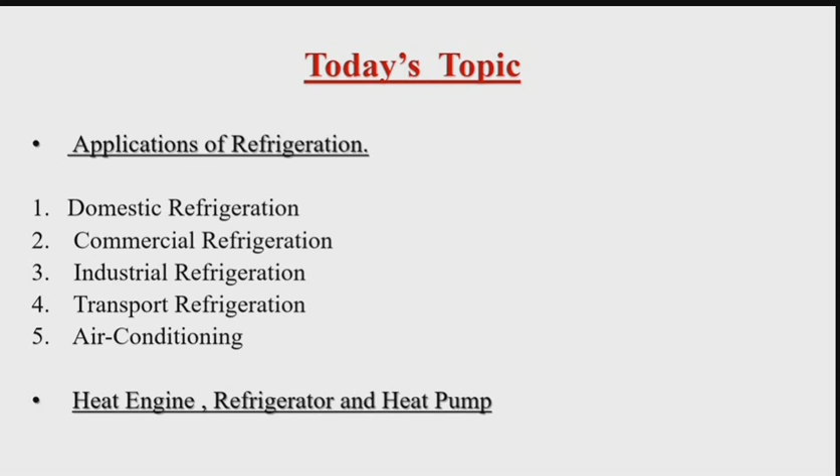In the application of refrigeration, there are mainly 5 applications. First one is domestic refrigeration, second one is commercial refrigeration, third one is industrial refrigeration, fourth one is transport refrigeration, fifth one is air conditioning. So what is domestic refrigeration? Domestic refrigeration deals with providing a low temperature place for preserving eatables, drinks and medicines.

The use of the refrigerator in our kitchen for the storage of foods, fruits and vegetables allows us to add fresh salad to our diet year round. There are a lot of fish and meat items we have to store, and we can store them in domestic refrigeration. Some meats and fishes need a longer storage period, so domestic refrigeration can also be used for storing these types of food items.

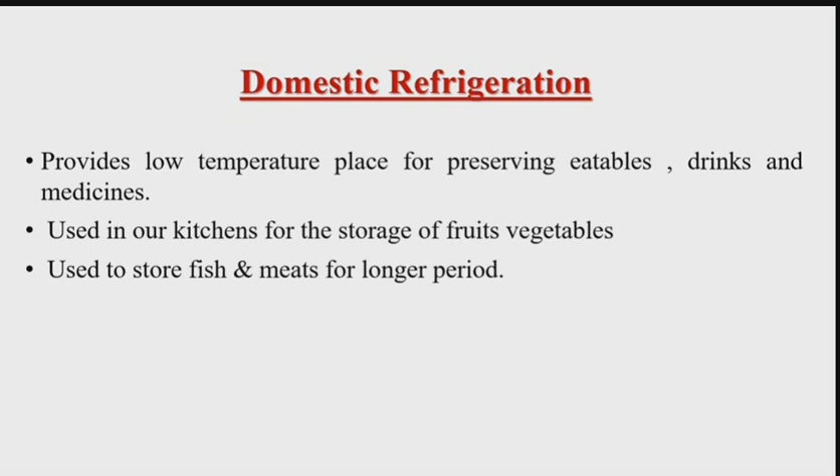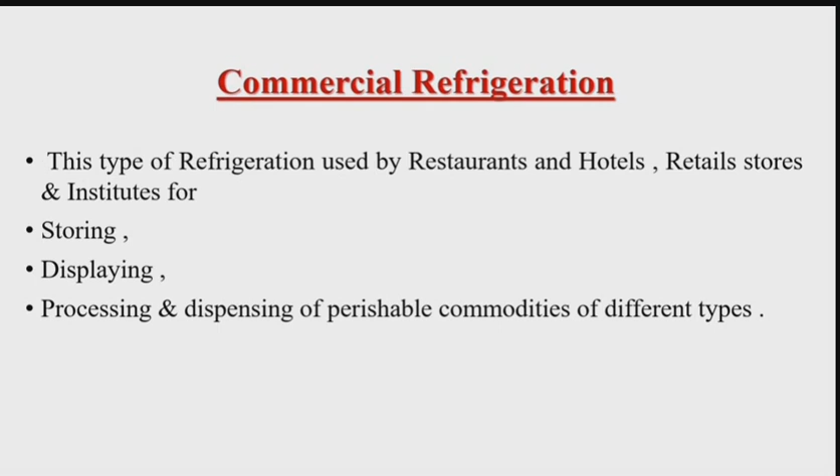The next one is commercial refrigeration. Commercial refrigeration is related to refrigeration fixtures of the type used by restaurants and hotels, and also retail stores and institutions, for storing, displaying, processing and dispensing perishable commodities of different types.

Next is industrial refrigeration. Here we are concerned with systems which are larger in size and cooling capacity than those of commercial applications, like industrial applications such as ice plants, large food plants, and chilling and storage of foodstuffs including beverages, meat and poultry products, dairy products, vegetables, fruits and fruit juices, etc.

The processing of food products and farm crops, and also the processing of textiles, printing work and photographic materials, all come under industrial refrigeration. Industrial refrigeration is also applied in oil refineries and synthetic rubber manufacturing. In oil refineries, chemical manufacturing and petrochemical plants, refrigeration is used to maintain processes that require low temperatures.

It is also used to liquefy gases like oxygen, nitrogen, propane and methane. For compressed air purification we need this industrial type of refrigeration; it is used to condense the water vapor from the compressed air to reduce its moisture content.

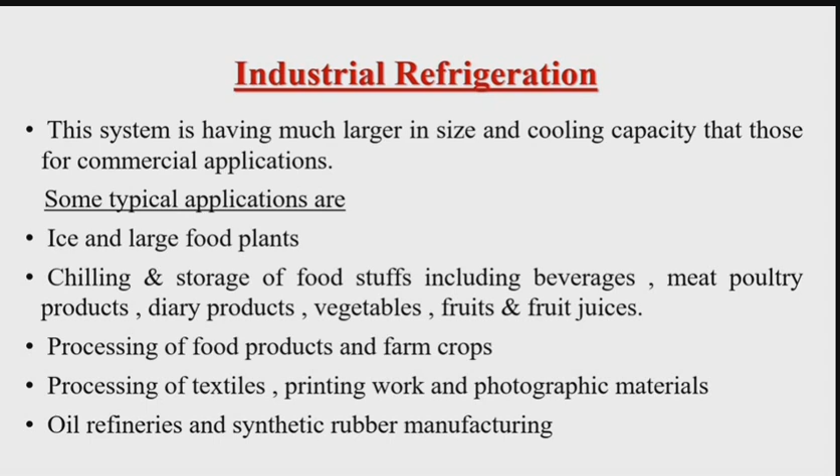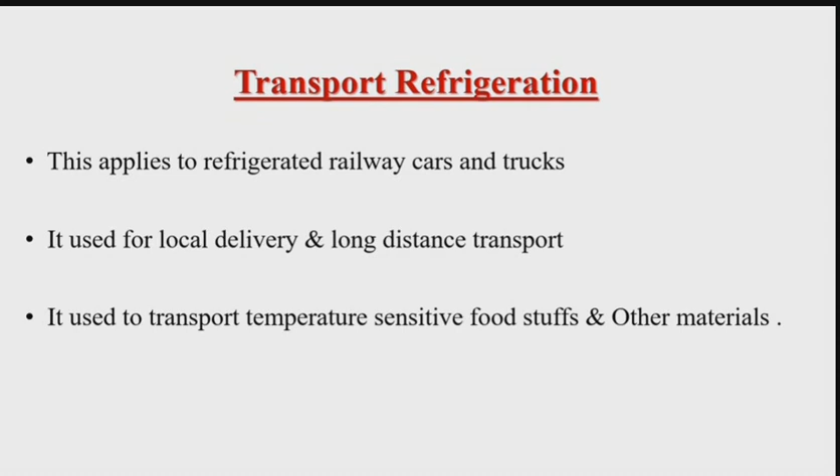Okay, the next one is transport refrigeration. We apply this to refrigerated railway cars and also trucks for local delivery and long distance transport of sensitive food items like fish and some other materials. Okay, so the next one is air conditioning.

So what is meant by air conditioning? Air conditioning refers to the simultaneous control of temperature, humidity, cleanliness and air motion. Space which is cooled to provide comfortable and healthy conditions for the occupants is called comfort air conditioning. Residences, offices, theaters and hospitals need air conditioning for these purposes.

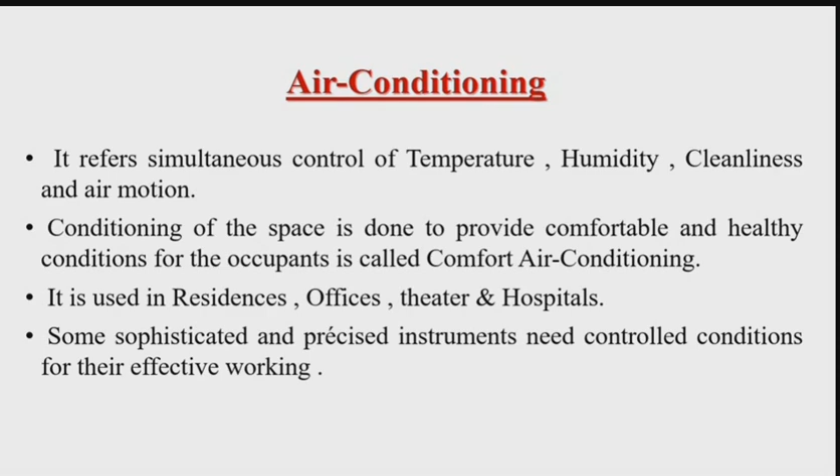Some manufacturing processes need to be done under controlled environmental conditions. Even some sophisticated precision instruments need these conditions controlled for effective working. Conditioning done for this purpose is called industrial air conditioning, and it is concerned with producing an environment suitable for computer centers, pharmaceutical units, printing works, photographic products, precision devices, production shops, laboratories, etc.

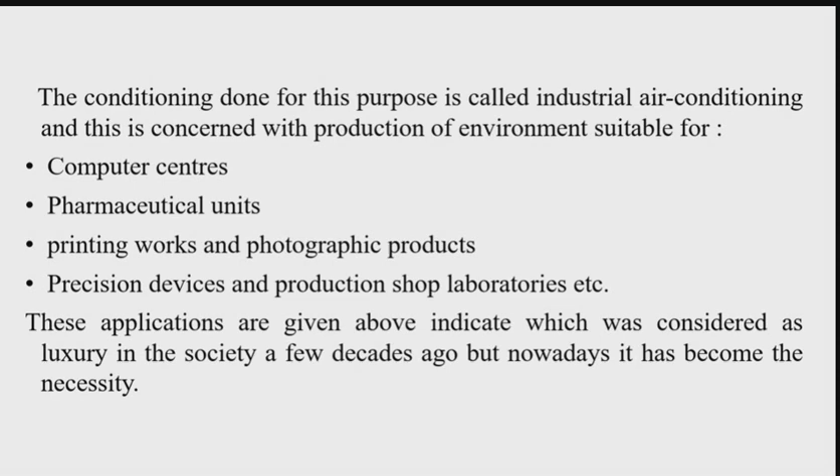These applications clearly indicate that refrigeration and air conditioning, which were considered a luxury in society a few decades ago, are nowadays very necessary for the present society and a tool for higher productivity. So that is about the applications of refrigeration. Now we are going to study about the heat engine, heat pump and refrigerator.

So what exactly is a heat engine? A heat engine is a thermodynamic device which is used for the continuous production of work from heat when operating in a cyclic process. As you know, both heat and work interactions take place across the boundary of this cyclically operating device. So essentially a heat engine takes heat from the combustion of fuel and converts some part of this energy into mechanical work.

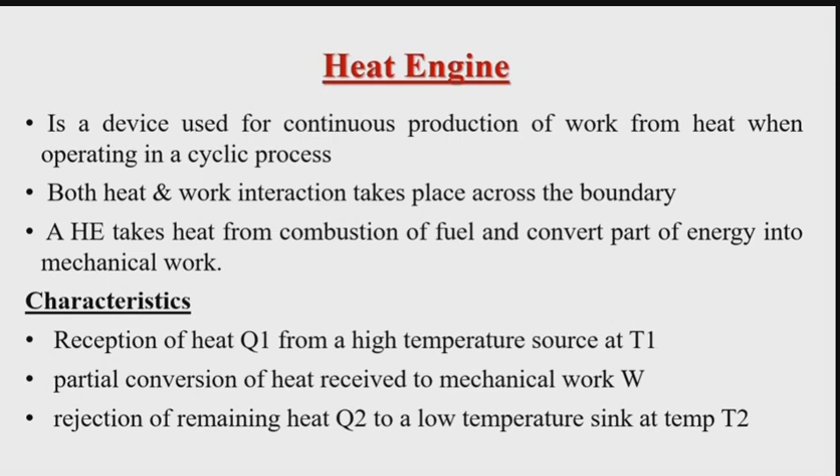So the heat engine is characterized by the following features. The first one is the absorption of heat Q1 from a high temperature source at T1, the partial conversion of this heat received into mechanical work, the rejection of the remaining heat Q2 to a lower temperature sink at temperature T2, and the cyclic or continuous operation. Then there is the working substance flowing through the engine.

So the figure given below shows that there is a source and a sink having temperatures T1 and T2, and the energy Q1 passing from the source while this heat engine is working. So we can see that of the energy Q1 received from the source, some part of this heat is turned into work, and the balance goes to the sink at T2.

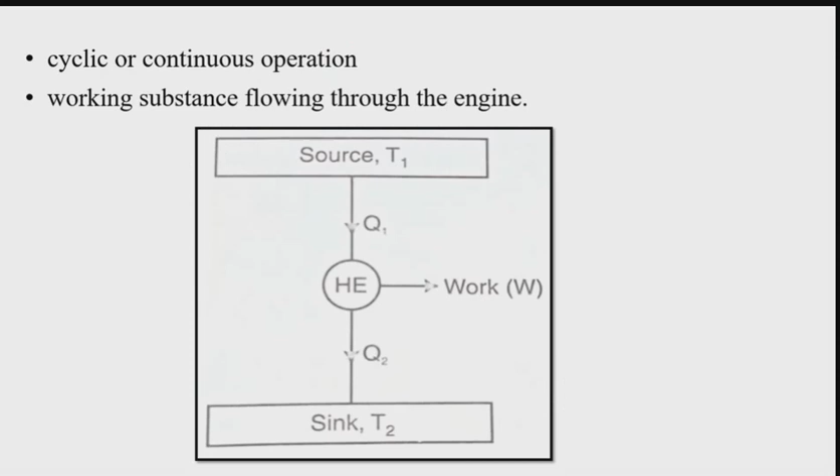Now, what is meant by performance actually? The performance of any machine is expressed as the ratio of what we want to what we have to pay for. In the context of an engine, the work is obtained at the expense of the heat input. Accordingly, the performance of a heat engine is given by the net work output to the entire amount of heat supplied to the working medium, and the ratio is called the thermal efficiency. The thermal efficiency is a measure of the degree of useful utilization of the heat received in a heat engine.

So it is given in the equation that eta thermal is equal to the net work output divided by the total heat supplied. And you can see in the figure two equations given, that is W equals Q1 minus Q2, where Q1 is the heat received from the source and Q2 is the heat going to the sink. So the equation becomes eta Th equals Q1 minus Q2 divided by Q1, which is equal to 1 minus Q2 divided by Q1.

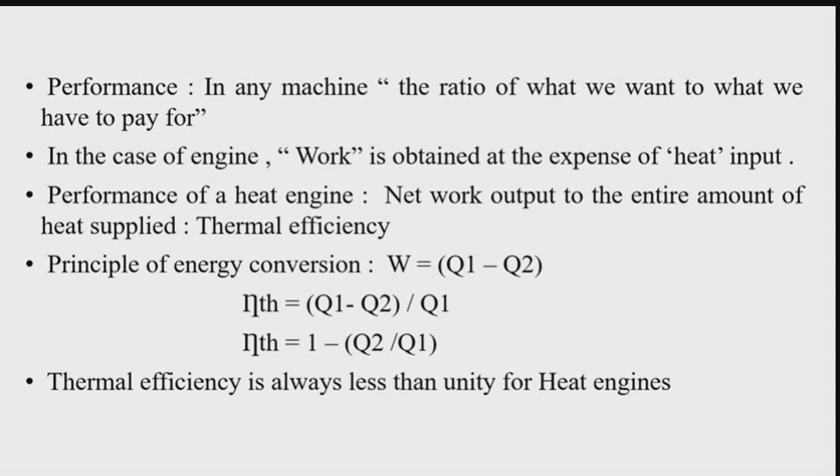So obviously the thermal efficiency of a heat engine operating between two thermal reservoirs is always less than unity. To increase the thermal efficiency, it is necessary to reduce Q2 relative to Q1. Q2 is the heat rejected and Q1 is the heat supplied. The thermal efficiency could equal unity only if Q1 goes to infinity or Q2 is equal to 0, which cannot be realized in practice.

So next we study refrigerators and heat pumps. Refrigerators and heat pumps are reversed heat engines. Reversed means backwards, so the directions of the heat and work interactions are opposite to those of the heat engine, that is, work input and heat output.

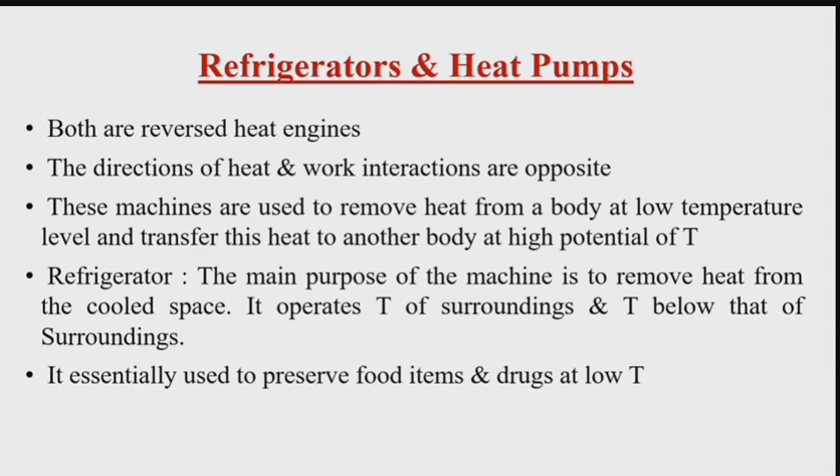These machines, refrigerators and heat pumps, are used to remove heat from a body at a lower temperature level and transfer it to another body at a higher temperature. When the main purpose of the machine is to remove heat from the cooled space, it is called a refrigerator. A refrigerator operates between the temperature of the surroundings and a temperature below that of the surroundings. Refrigerators are essential for daily purposes, like preserving food items and drugs at low temperature.

Next, the term heat pump is applied to a machine whose objective is to heat a medium which may already be warmer than the surroundings. A heat pump operates between the temperature of the surroundings and a temperature above that of the surroundings. Heat pumps are generally used to keep rooms warm in the winter.

The source and the sink contain some infinite amount of energy, and the source is always considered to be at a temperature higher than that of the sink. However, there will be some relative terms, that is the atmosphere, which we can use as a source or the sink. In the working of a refrigerator, the surroundings become the source compared to the space being cooled. But in the case of the heat pump, the surroundings become the sink compared with the room which is to be heated.

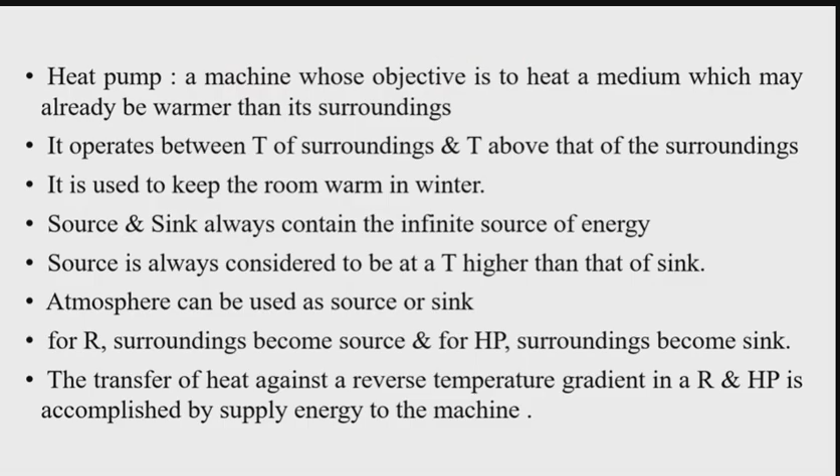So the transfer of heat against this reverse temperature gradient in a refrigerator and heat pump is accomplished by supplying energy to the machine. There are some figures which show this heat pump and refrigerator. You can see here that the space being heated is above. In the case of the heat pump, there is a space to be heated, and at the bottom the surroundings are provided.

So the heat pump takes the heat from the surroundings and provides it to the space to be heated. So the heat pump is used for a space which is to be heated. So the temperature there should be greater than the temperature of the atmosphere. What the heat pump is doing is getting some work input from some energy which we provide. Using this work input, some amount of energy is taken from the surroundings and provided to the space being heated.

So Q2 is the amount of heat taken from the surroundings, and Q1 is the overall heat, that is Q2 plus W, which is provided to the space being heated. In the next figure, the refrigerator is a machine which takes heat Q2 from a space being cooled with the help of some work input. So the refrigerator needs some work input, and using that work, heat is taken from the space to be cooled and rejected to the surroundings, which is actually at T equal to T atmosphere.

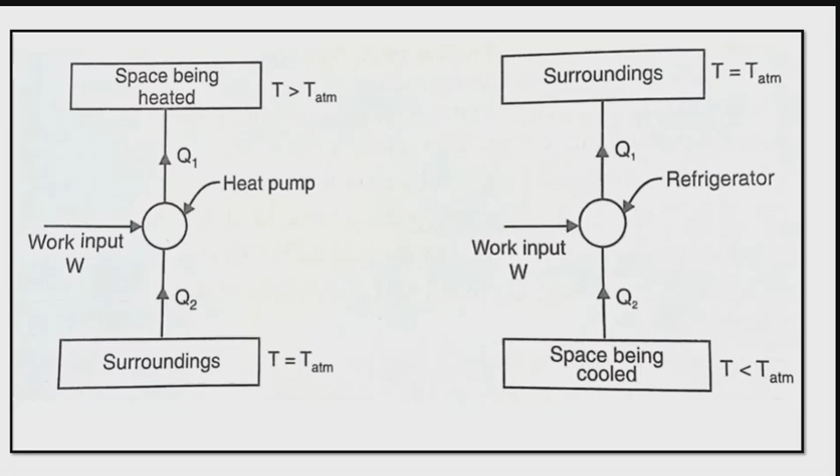From the principle of energy conservation, we know that W is equal to Q1 minus Q2, and the COP of the refrigerator is equal to Q2 divided by Q1 minus Q2. Depending upon the type of refrigerating system, the value of the COP may be less than 1 or greater than 1; in most refrigerating machines, the value of the COP lies between 3 and 4. The COP is greatest when the temperature difference is the least.

In the case of the heat pump, the desired effect is the amount of heat Q1 supplied to the space being heated. So the heat rejected at a higher temperature divided by the work input is the COP of the heat pump, which is equal to Q1 divided by Q1 minus Q2. That is equal to 1 plus Q2 divided by Q1 minus Q2, which is equal to 1 plus COP of the refrigerator. So the COP of a machine operating as a heat pump is higher than the COP of the same machine operating as a refrigerator by unity. The COP of the heat pump is sometimes termed the energy performance ratio.